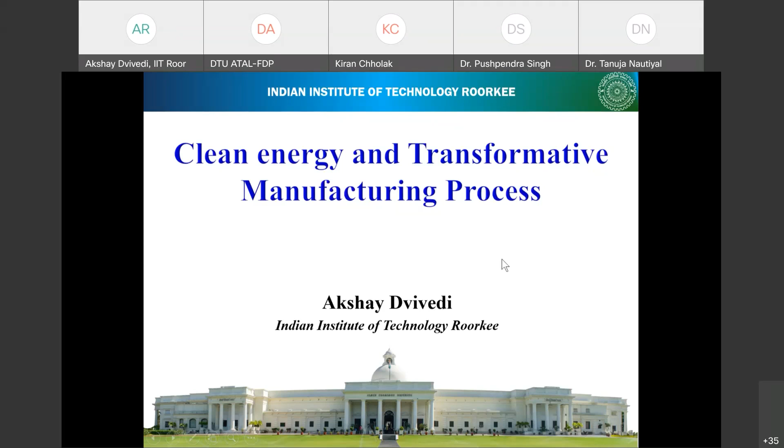Yes. All right, see, the idea here is JFK said one person can make a difference and everyone should try. Now, as engineers, we often make new things, we make certain processes to make those new things, and we go by some textbook kind of definition that a process is there and you can use this process to make certain products, and then sell those products out in the market.

But of course, that involves certain sales channels and other things. But let's say if you are a researcher in the engineering community, can you make a difference? The answer to this question is very simple. Yes, if you try, you can make that difference. So from today's talk, we will be discussing how we can try that, what are the potential issues in a particular process, and then how to solve those issues and still get a positive outcome, which is a win-win situation for all.

One thing which now comes in is what is sustainable development. There is a commission which defines sustainable development as that which meets the needs of the present without compromising the ability of future generations to meet their own needs. So we have to understand that whatever practice we follow right now should be beneficial for us, no doubt, but it should not be detrimental to future generations.

And environment is something which is very important. Mother Earth is something which is going to take care of us for a long time. Usually, if we respect Mother Earth, we will be gaining a lot in future. However, if we do not care about the environmental aspect, the generations in future will be facing serious troubles.

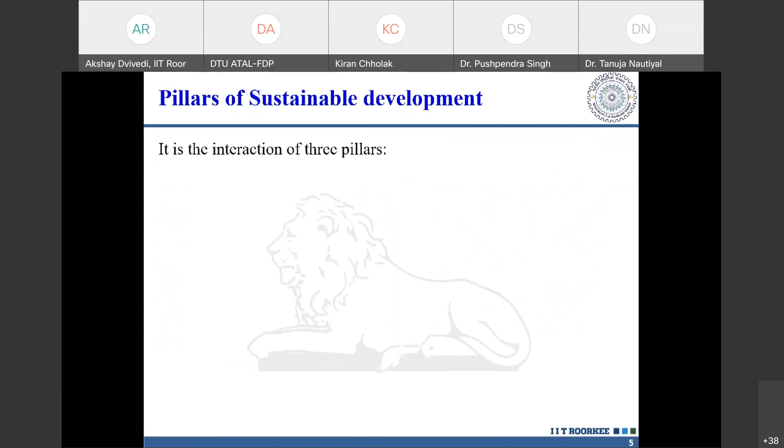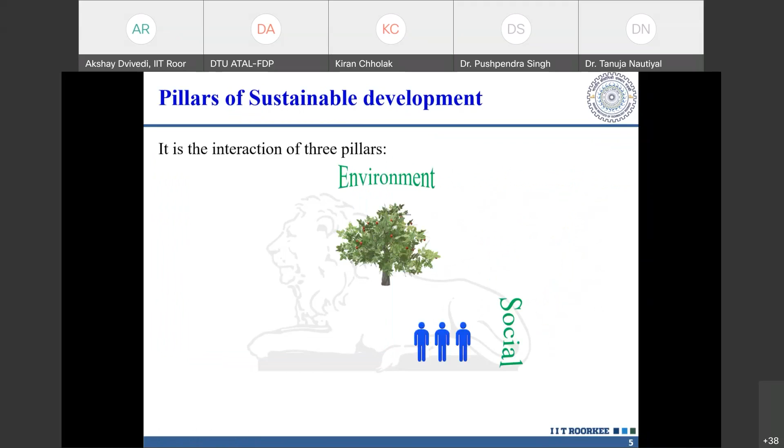To understand this, we have to understand there are certain pillars of sustainable development. The first pillar is environment - whatever activities you do should be focused towards the environment. The second pillar is social - whether what you are doing is reflected in society at large. The third pillar is economy, which is of course predominant and a driving factor - whatever you do, you have to gain profit.

In my own humble sense, one statement: Lala ji ko profit chahiye. No industry can survive without profit. So you have to find ways where whatever you do brings in profit, but it should also be beneficial to society, and it should not degrade the environment in any way. When we combine all of these things, only then does sustainable development come in.

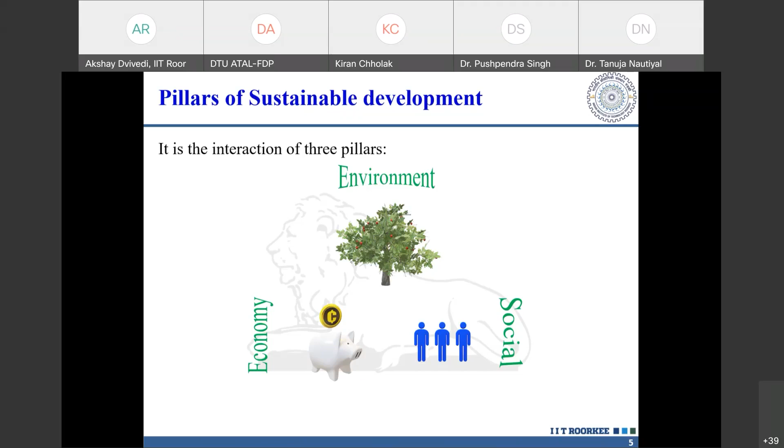Now in doing so, we have to understand one specific definition: creation of manufactured products that use processes that minimize negative environmental impacts, conserve energy and natural resources, are safe for employees, communities, and consumers, and are economically sound. This particular definition is what we have to follow.

One thing which is also very important is when we say safe for employees - employees are basically internal customers of a company, internal customers in the sense that they are interacting with the products we manufacture. Their outcomes, or whatever they experience, goes into the end product which society is going to use.

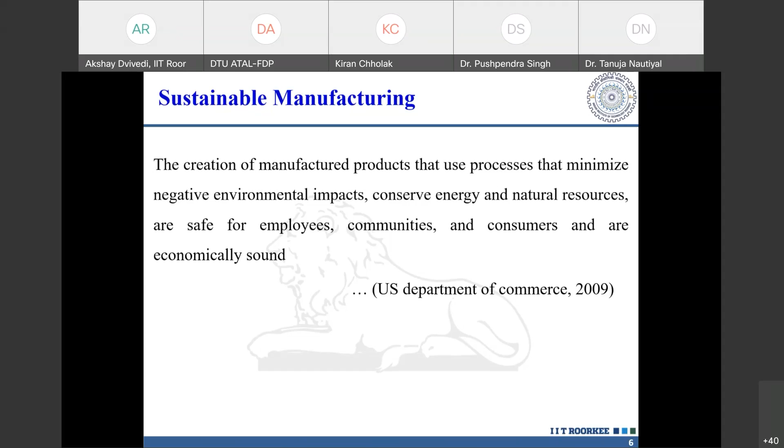So overall, what happens in this continuous chain is from internal customers to external customers, where customers can be the complete society. Everything should be behaving in line so that environmental impact is either zero or bare minimum. In doing so, we have to develop certain manufacturing processes that can give good results in terms of profit or finance, and of course should also be beneficial for society at large.

In doing so, there are a few important things that now come in, and one of the biggest buzzwords here is innovation. When innovation comes into picture with the mindset of sustainability, that gives far better outcomes. Innovations usually promote accelerated growth in manufacturing, but the idea here is sustainability, and the background idea behind sustainability is Mother Earth. If we can develop all of these things in a simultaneous way, we can generate certain wealth.

That will be resulting in more comforts, which is then reflected into societal well-being. And if we can have wealth as well as societal well-being, we need to develop a mindset where everyone working in the research community, or with an engineering background, should have efficient education and training, so that whatever they do, they keep in mind that sustainability and environment are very important.

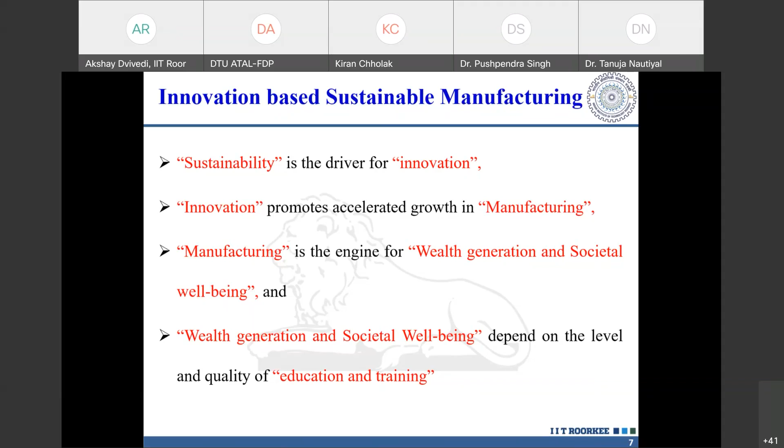Now, certain elements come in: number one, environment friendliness, which we have talked about in detail. Second, if you are working on a manufacturing process, you have to ensure there is no or minimal waste that comes out. And for this minimal waste, there are 6 R's which come in. One R, with respect to a product, is repair - can the product be repaired easily?

Second question that comes in is, can it be repaired cheaply? Third question that comes in is replaceability. Can the parts be replaced rather than the whole product becoming unusable? This is one important requirement, where whatever process that you use to develop a product, if that particular process is designed in a way where repair can actually be an integral part in the thought process, we can have minimal waste, and we can manage that particular waste in a much more refined way.

Another thing which comes under waste management is reuse. So here, let's say if a product can be reused, perhaps in a new way, or maybe we do something so that we can extend its life, we can again reduce the waste. Here, there can be more questions. For example, can a part be reused? Or maybe it is possible to dismantle that particular thing for reuse. So if that particular reuse is again possible, we will be lowering down the waste part.

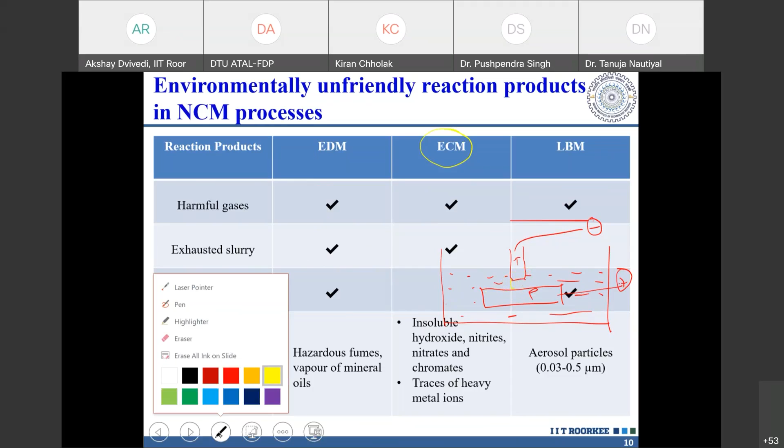Now, talking about another process, for example, electrochemical machining. Here again, we have a similar kind of case where a tool and a work material both come into picture. Here we have a bath, and this bath is filled with electrolyte. The electrolyte is basically conducting. So again, we provide a negative polarity to the tool, positive polarity to the workpiece, and as soon as we apply the potential difference, there is a mechanism which comes in, named anodic dissolution.

With anodic dissolution, the work material, when it gets removed, either gets dissolved in the electrolyte, or in certain cases it creates certain insoluble precipitate. So as soon as you get a shape or cavity created in the work material, the removed material gets into some sort of solid precipitate, and this solid precipitate finally settles down in the bath. End result is you finally remove this precipitate and throw it in the environment. That is again going to create certain issues where environmental damage comes into picture.

Similarly, with laser beam machining, we have a wonderful case where this is one of the finest processes used for very precise machining. But in this case, whenever a laser beam strikes a work material, it creates a temperature of around 8,000 to 12,000 degrees centigrade, and it can easily drill or machine any kind of non-reflective surface. In doing so, the process that comes in is usually sublimation, where the work material directly converts from solid to gas, and you get the desired feature.

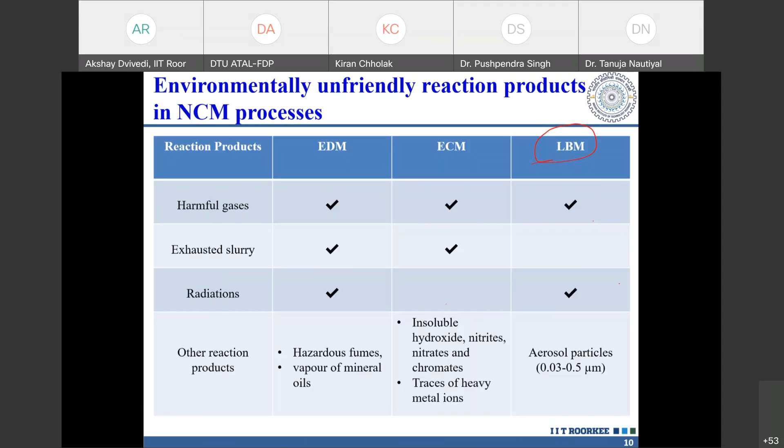So can you develop a system which can make machining easy, where lesser capital cost is required, where you can also lower the operational cost, where you do not create environmental hazards, where the system becomes safe for the people working with it, and still get the best possible outcomes so that profit comes in? These are certain issues which now come in.

Now, for addressing these issues, the research community has been doing multiple things over a period of time. And with those multiple things, they have actually made process hybrids. In certain cases, these hybrids were minor modifications in the process, or in certain cases, they actually combined two different processes to get the best possible outcomes from that combination.

Now, one simple case is EDM, where multiple variants have evolved over a period of time. One such variant is named dry EDM. The second variant is near-dry EDM. Both of these variants are often termed green EDM. In certain cases, when a combination of energies is done in a way where both energies equally contribute to the material removal, we refer to the process enhancements as hybrid EDM.

With the laser, similarly, you have eco LBM, you have underwater LBM, where aerosol particles, when they go out, basically do not go here and there, they remain in the water, and those particular aerosols do not create an environmental impact, and you can filter that particular water over a period of time.

Similarly, let's say if we talk about electrochemical machining, there are certain ways how you can channelize the energy in a much better way, where you can actually control the process so that it is environment friendly. Over a period of time, certain hybridization of different energies have come up. For example, if EDM and ECM are both clubbed, the process basically converts into electrochemical discharge machining.

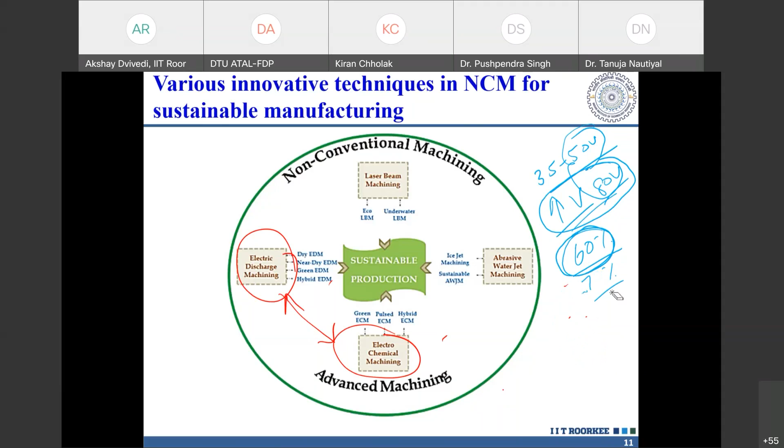Basically, maybe in earlier case, you were just using 60% of the energy that was provided. But with this particular brute force, the energy utilized is only up to 70%. But you have basically doubled the input in terms of your voltage. So can you actually have a far better utilization of energy right at, let's say, 35 volt, from 60% to maybe 80% or maybe 90%? Can we do that particular part? These are few questions which now come, which require a certain research kind of mindset.

Let me talk about, let's say, EDM, and let's see what can be a different alternative which can fulfill all of those particular requirements. See, the most important element in an electric discharge machining system is the dielectric medium. Usually you have a particular bath in which you will be having your work material, which is electrically conductive, and a tool which is again electrically conductive. You provide polarities to both of these. You fill this entire bath with dielectric medium.

Usually in electric discharge machines, the amount of dielectric medium available in this entire system is approximately 200 liters. 200 liters. There is a circulation system wherein dielectric medium goes from the bath to the recirculating system, which has some kind of filters, which filter the dielectric medium and then replenish the bath at a particular flow rate. So as soon as some contamination comes into the dielectric medium, the filtration system is going to clean that and you can get fresh dielectric medium.

But the issue here is what happens with that contamination where the dielectric medium burns out. What happens to those toxic fumes which are there in the system? Now, one objective we have is, let's say during this process, whenever sparks are coming in, those sparks will be resulting in toxic fumes. Now, if I ask you a solution for this, what will be your way of addressing this query?

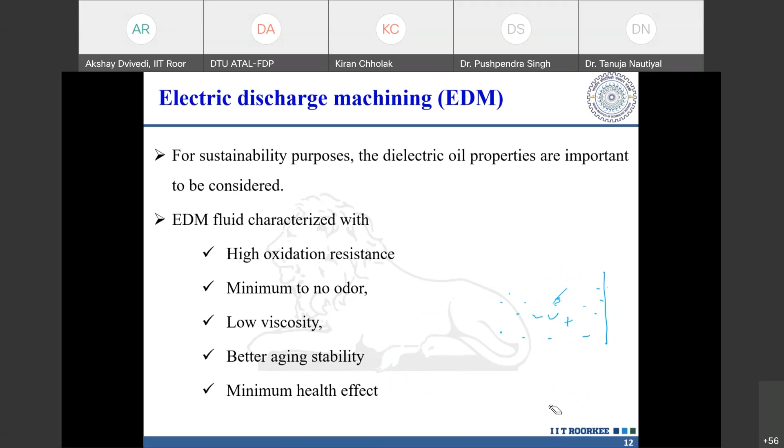And to address these issues, let us talk about a process which has emerged over a period of time, and that process is named near dry EDM. Now, in near dry EDM, basically you have a dielectric medium which is a mixture of some kind of gas and some kind of liquid. And in this case, an atomized spray of dielectric medium comes into picture.

I hope I am audible, since I am not having any kind of response. Yes, sir. Everything is fine. Okay, I will just take a minute. There's an important call. Just wait for a minute. Yes, sir, please.

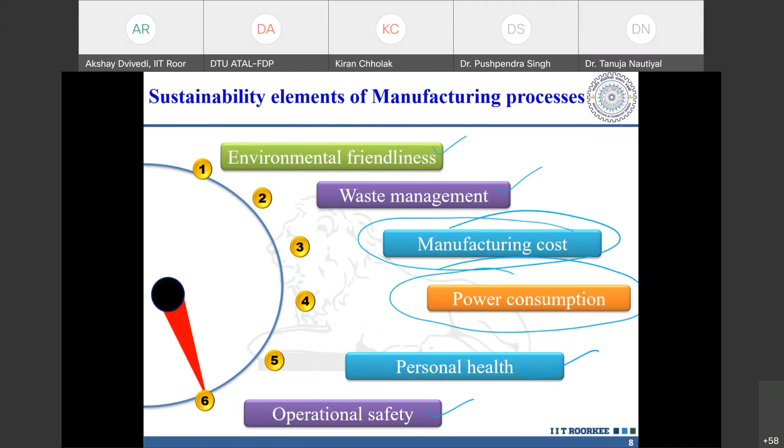Manufacturing cost. Second element is power consumption. Of course, personal health we have talked about, it is safe. Operational safety we have talked about, it is safe. Waste management we have talked about, it is safe. And we also talked about environmental friendliness, which is okay. The near dry EDM is a far better process. Now, what happens with respect to manufacturing cost and power consumption?

Talking about these things, let us take a case where you have a commercially available die sinking conventional EDM facility procured from the market. Cost of this equipment is, let's say, rupees 20 lakhs. Now, what do you need to add for converting this system from a conventional EDM to a near dry EDM? You need a compressor, 5 to 7,000 rupees.

You need a pump for mixing this liquid dielectric, maybe another 5,000 rupees. You need a mist generator, which can be sort of a, let's say, minimum quantity lubrication type. And that is basically nothing but a nozzle where high flow pressure goes in terms of liquid and gas. That is going to cost you something around maybe 2,000 rupees. Some alterations are required for, let's say, some hoses and adding those things. Let us add maybe another 2,000 rupees for that.

So more or less, you can basically develop this complete system in only overall 20,000 rupees. Of course, you should have a design for that. 20 lakh rupees system, which was the capital cost of an EDM. If you have to convert it into a near dry system, you just need to add another 20,000 to it.

The material removal rate is increased by something around 5 times. Surface quality is improved by something around 2 times. You have bare minimal recast layer. The process is environment friendly. It is non-toxic. Will you go for this process? If you go for this process, are you creating any environmental damage? No.

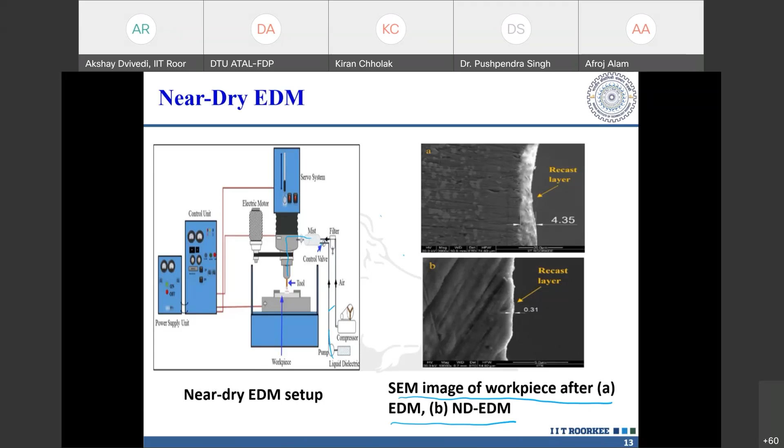You have decreased dielectric cost. You have environmentally conscious manufacturing. You have reduced manufacturing cost. The performance characteristics in terms of material removal rate and surface quality all improve. And you have more or less a simple kind of modification in terms of machine tool structure.

So before I proceed, do we have any kind of query with respect to this entire thing? I was quite quick in explaining the mechanism part, but in case you have a query, please feel free to ask me. If anybody has a query, that person may unmute himself and ask. I think, sir, nobody has any query.

All right, so this is just one example. Now, in near dry EDM, if you have to further improve, there can be multiple combinations where you can have a combination of different dielectric mediums which can provide far better results. One way to do that is you experiment with all of these dielectric mediums and get the results out. With those results, you do a quantitative assessment of the performance characteristics, and also understand the kind of toxicity these dielectric mediums provide, keeping all the cost considerations in picture.